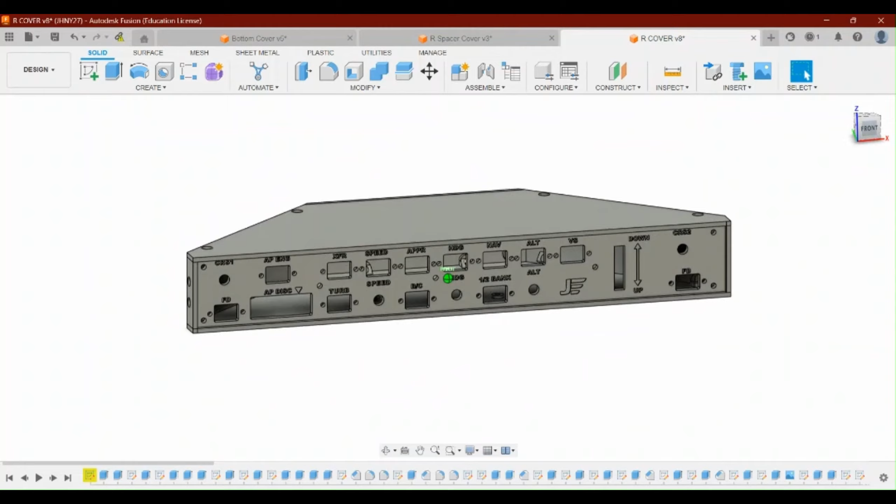The front panel is complete, and now it's time to design the case that will hold everything. This includes the side, bottom, top, and back covers. Plus, I've added my custom JHNYVIONICS logo to the back cover for that extra touch.

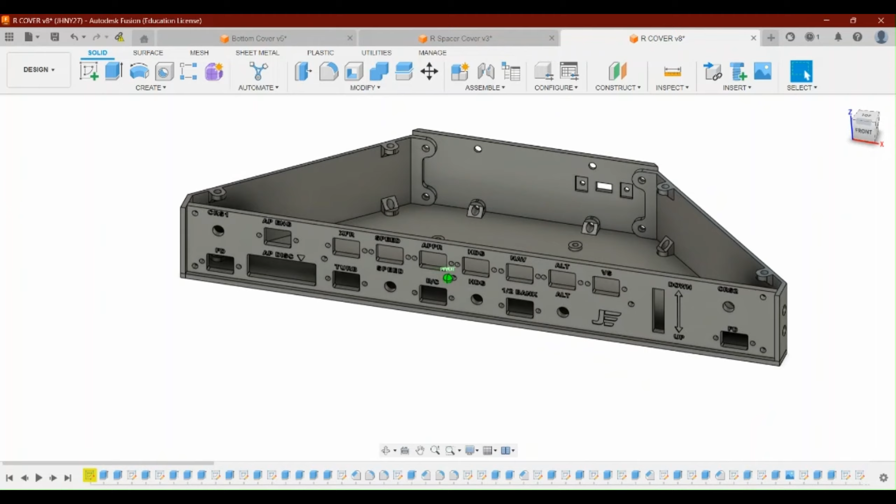To make this case sturdy and functional, I'm considering the fit of the front panel, the need for ventilation, and of course, the aesthetics. I've also added a personal touch to the back cover.

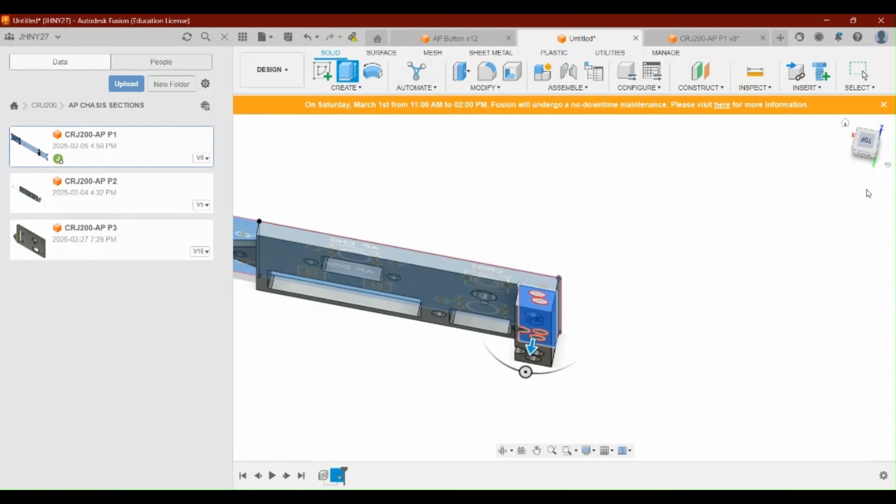Before designing any cover, we need to model the left and right spacer, the ones that will hold in place the interface board, the front panel, and the side covers. These are small pieces but are the most important ones.

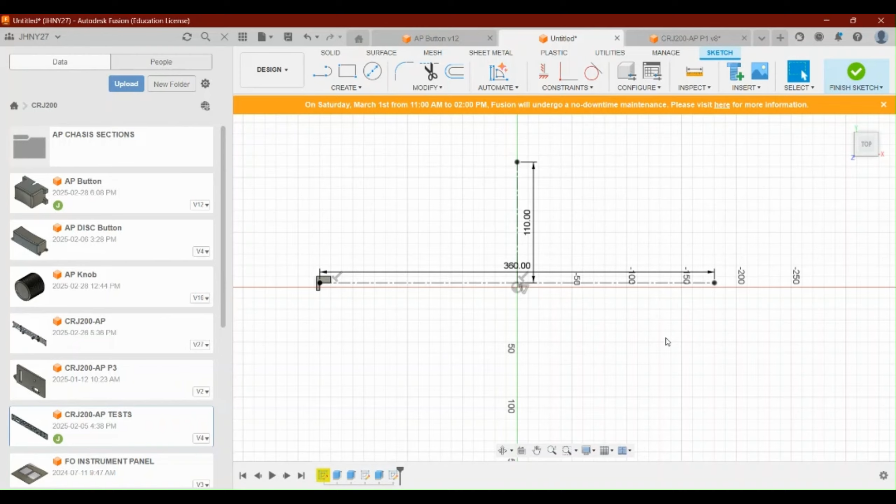First, I'll create the side covers to support the structure and align perfectly with the front panel.

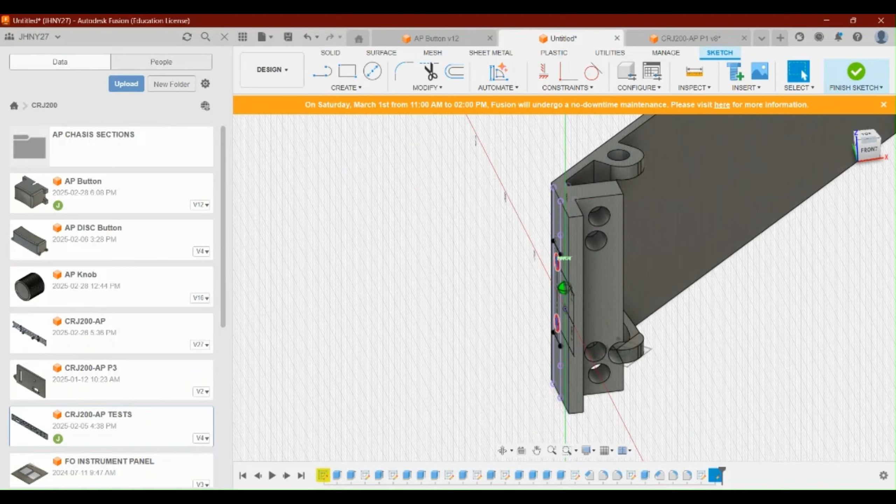Now, let's design the bottom and top covers, making sure they're secure yet easy to access.

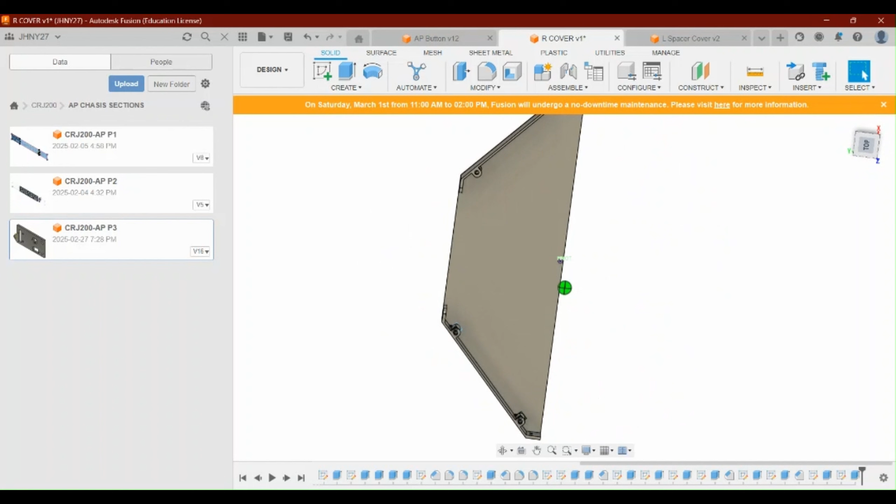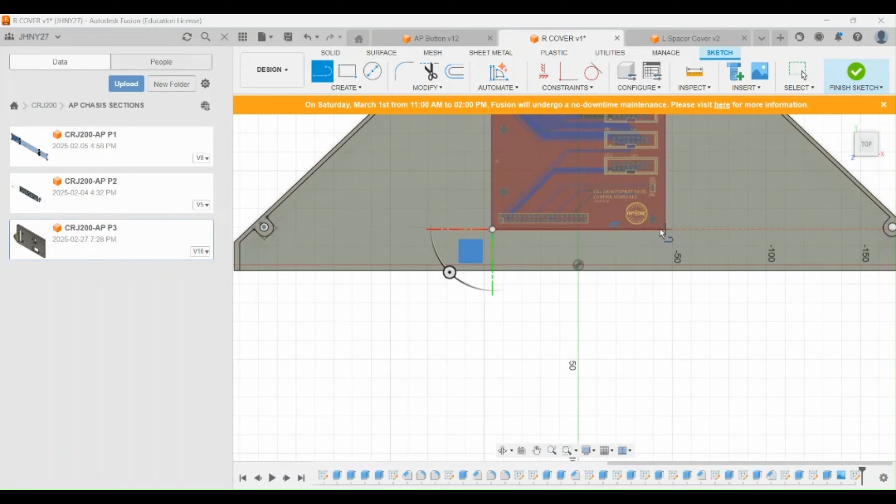Here is where we will decide where to put our control board, the one that we previously designed in the past video.

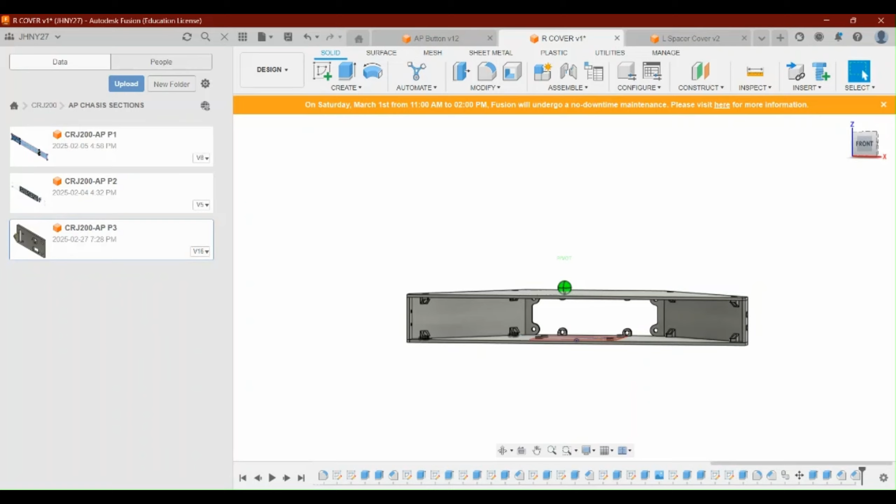Here's where it gets fun, designing the back cover.

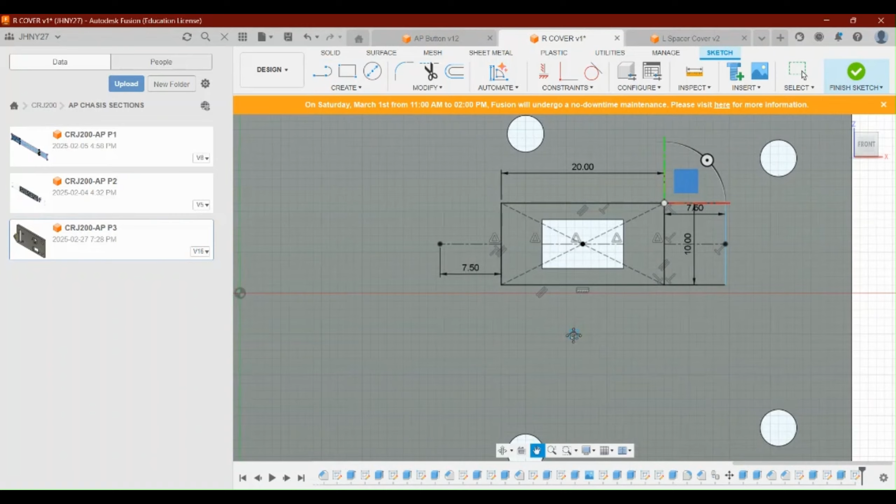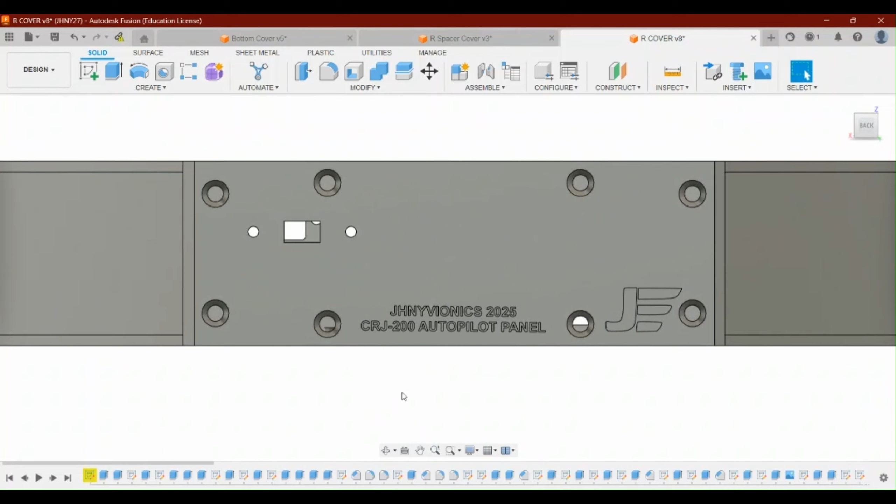I've added my JHNYVIONICS logo and labeled it JHNYVIONICS 2025 CRJ-200 Autopilot panel for that professional finish.

The case design is complete. Now, it's ready for 3D printing or CNC cutting. The next step is assembling everything and testing it out.

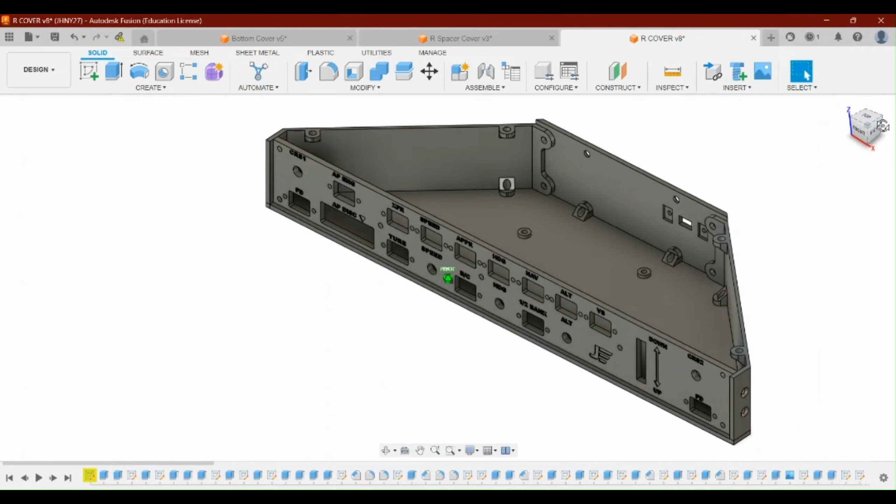And that's a wrap on designing the full case for my CRJ-200 Autopilot panel. From the side covers to the back panel with my custom JHNYVIONICS logo, every detail is ready for the next step.